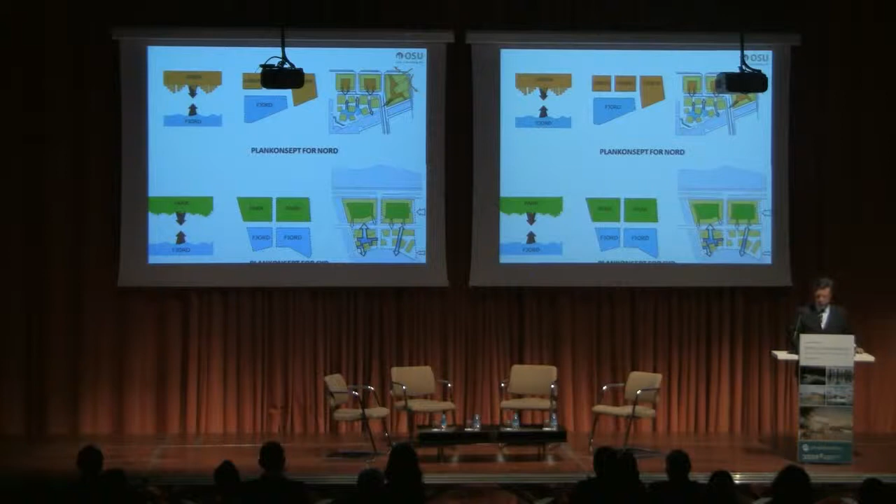So how does the city meet the fjord? And how does the city relate to the neighbor parks? So we merged together some with competitions, Vandkunsten and other architectural firms, and had a lot of different workshops working together closely with the client and also municipality. But we started the other way around, because this is how it looks now, but we started with a program.

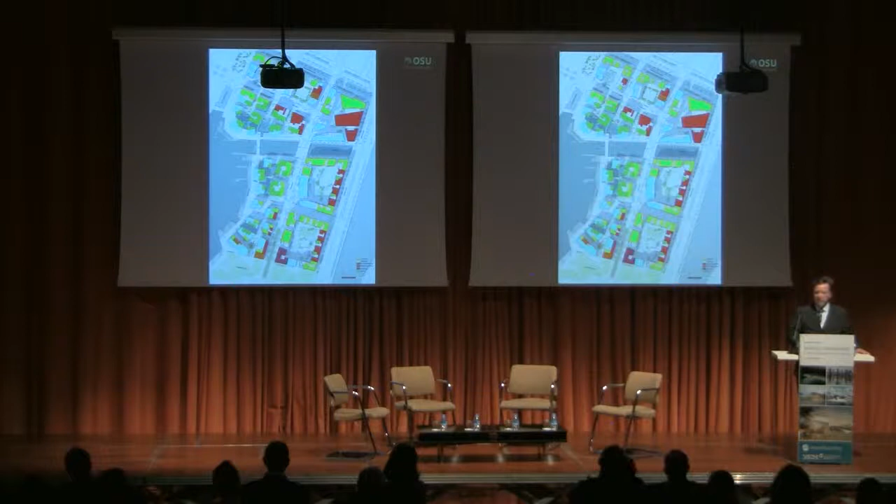How do you want the city to meet the fjord? We want an openness to the fjord. We want, what do you call it, like fingers. And we wanted restaurants. We want all these nice places. We want shops. We want people to meet. We want offices. We want housing. So, and we started then by working with the program.

How do we want this to happen? And then we said, this is not a series of projects. What we are doing is creating a city. So the black arrows you see are the main lines, the roads. So this is the parks. That's part of the big plan that the municipality makes. This is the new main roads. And this is the inner roads.

So what we did is to organize all this small pathway, all these looks, all this series of walking from space to space, and the total hierarchy of making an exciting city with destinations. How to look from the barcode through the niches, through a small gate, into a plaza, between buildings and out to the fjord and further on. How to make this fjord meet the city.

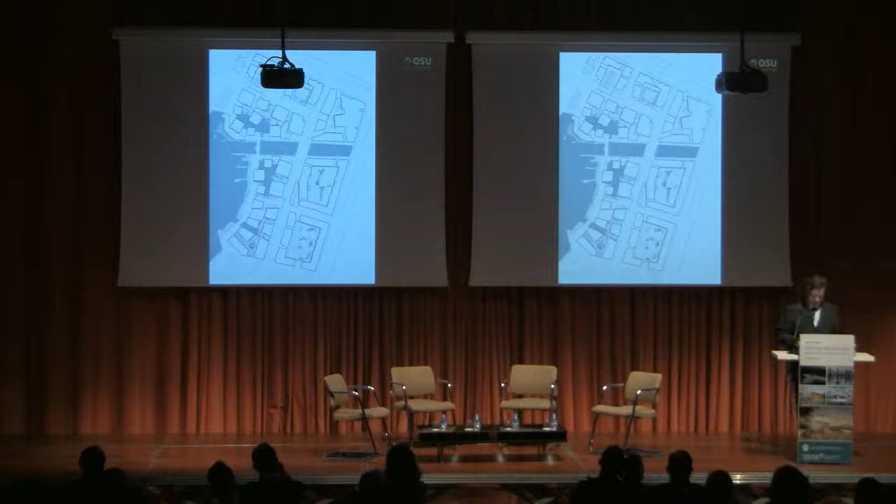Carefully, and in close dialogue with various landscape architects and planners, the municipality and the developers, we worked with every single space, defining the program: who's using it, for what, how big is it, have you seen this before, is it a good space, and defining what's private and what's semi-private. We made the small space on the corner where the bus stop is, the small pockets between the houses, making this filter that will be a city, not a project.

And then after having all the discussion, all the buildings started to emerge as structures and ended up like this. So the city meets the fjord — we call it porös, an openness between the buildings. Bigger structures defining and acting as walls towards all the other spaces and streets, making a clear hierarchy that altogether makes a city.

Seen from the fjord, you get this view to the left, designed by Vandkunsten, part of the whole project. We were very afraid this should feel like you meet a project — no, this is the city, it's the city growing, not project after project. I think that's a critical issue: first make the strategy, then make the architecture, not the other way around.

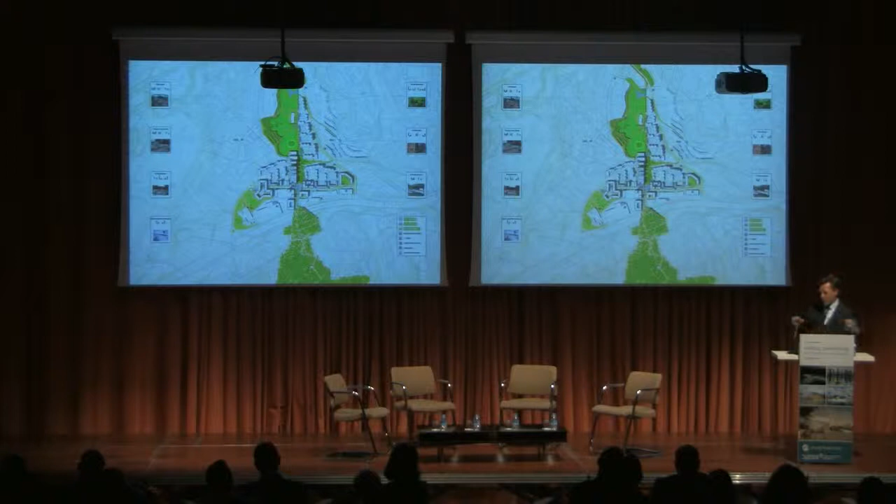Then we made a street, and we said, okay, between this cross — the street and the valley — we can make a plaza, and on that plaza we can succeed in having people meet. We can make one nice coffee shop in this program, and from there we can make this city grow. So that was the strategy.

What we then did was more urban repair, making all these fill-ins, transforming the suburbia into a more city-like structure, defined also by a generator project. It's as easy as this: the pink is the new, and this is all the suburbia and the blocks. So what we did is just define it as a center, making Furuset a city.

Last project I will present is another kind of challenge that we always see. You have this huge area — what do you call it — the sprawl within the sprawl. You have these villa areas, and then you have this industry from the 60s, and some railroads, and this huge mix. And nobody needs this industry anymore.

We have a railway station, and how do you develop this into what? What do you do with all this area?

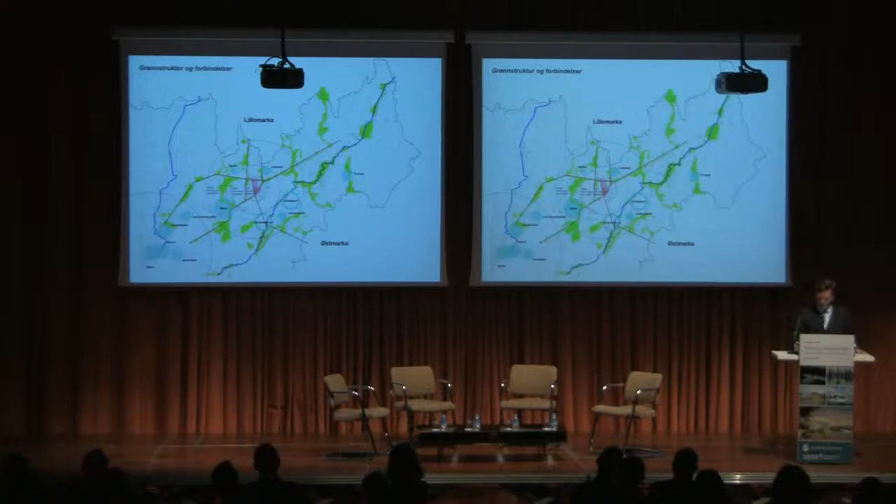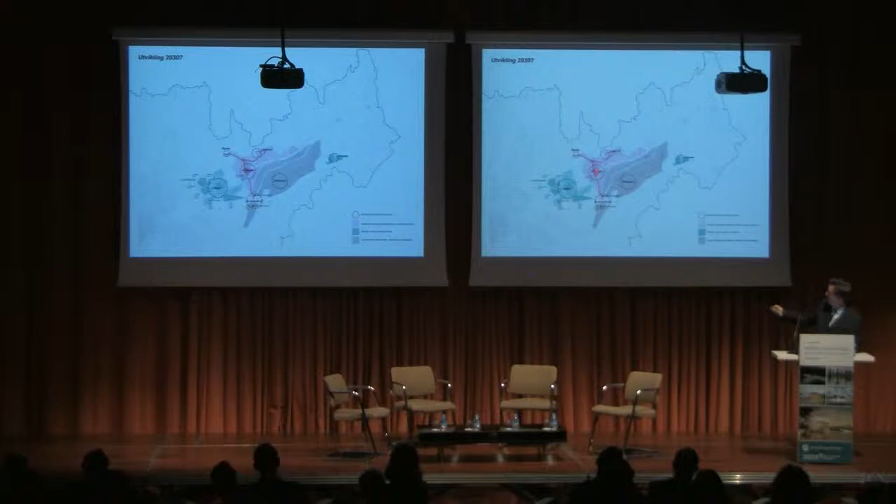So we had to zoom out. Find what is this place as part of the city? How does the streets and everything connect? How does it connect to the neighbor areas? And how does it connect to the green and all the biking areas? What is the drivers of the place? And we had to look into what will these be in 2030. You have these huge growing areas around this area, and this small pink is the site and the plot. What do we do there with this industry?

So we started with the same strategy, because we didn't know what to do. So we said, okay, let's start with the spaces. What kind of spaces and for whom? If we start there, we will see what happens. So we worked a lot with what are called BREEAM communities. We had a first BREEAM communities project in Norway, and we use that tool quite a lot.

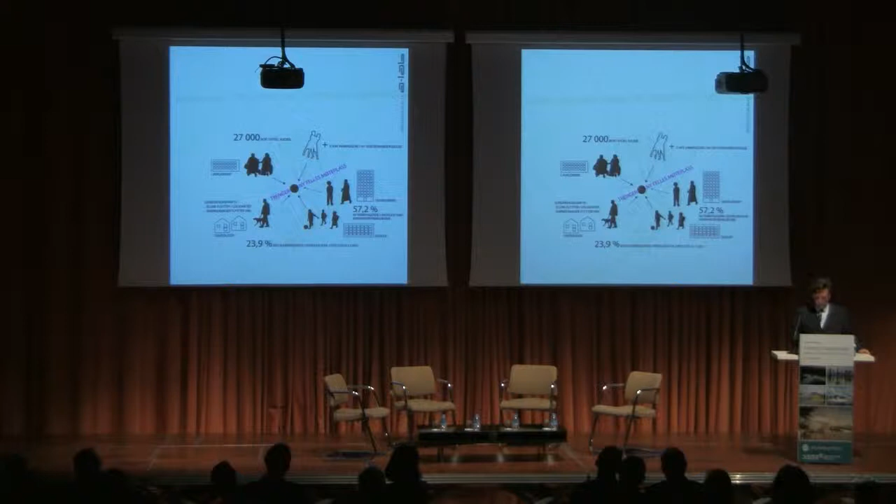Vollebekk has the same growth. It has 57% non-Norwegians. You have all kinds of houses around, and they have nowhere to meet. So we said, okay, let's make a place to meet. Let's organize these places within the schools and make connections so that you can find the tram train, you can walk through this area, walk to the school, and connect to the rest of the area. If you can make that succeed, then we can start building more.

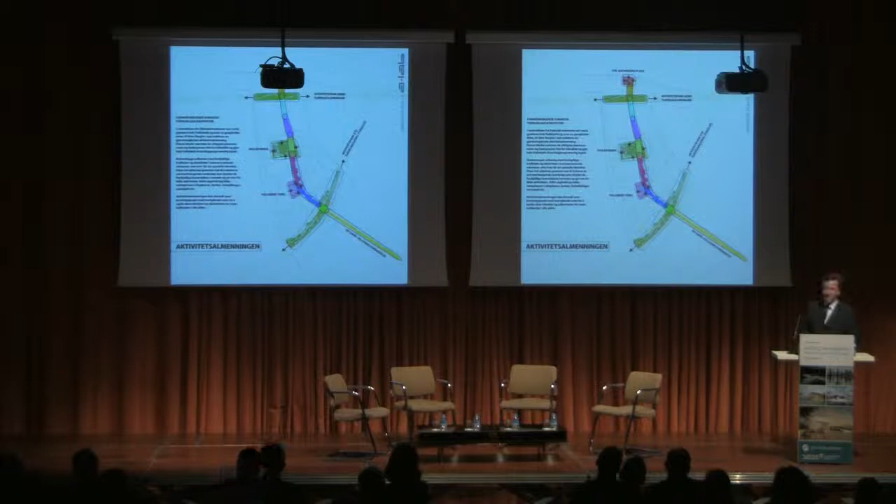So then we developed a landscape structure and make this grow, ending up in a patchwork of urbanity into a large-scale area that looks like this.

So if you remember the first picture, we had this industry here. What we do now is densifying this to be one of the nodes, a village within the village, a part of the city.

Each place has its own geometry. You cannot just take a structure from somewhere else. But it's a lot of structure and a lot of densities. And by studying the various densities and the structures in Oslo, we worked, and that's why we had to make a lot of new programs to make this happen.

So what we did was trying to find what's Vollebekk's, and I just showed this an example. This is a little bit how we work. And then we started working with the blocks, define them, creating the smaller spaces you wanted to have. We pushed the buildings to make even more of the small meetings, the corners, and all these other areas.

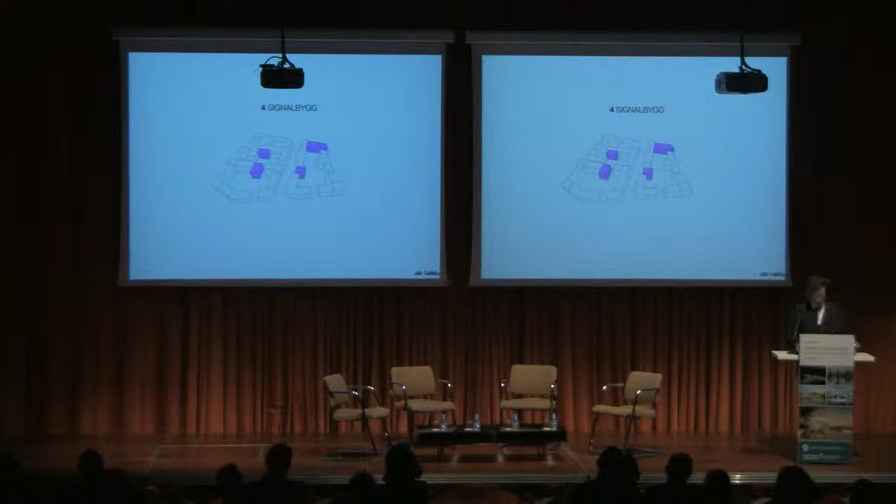We started working, very well aware of what Ellen said about the sun and all these rules that are coming. So it's important from the start to work with the sun, work with variation in heights, and make this nice. And then find the different buildings that need to be emphasized stronger than others, studying the sun.

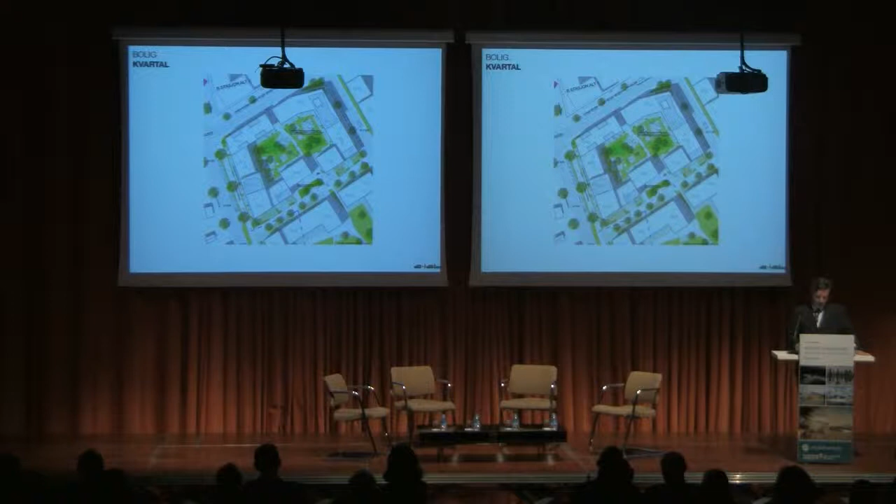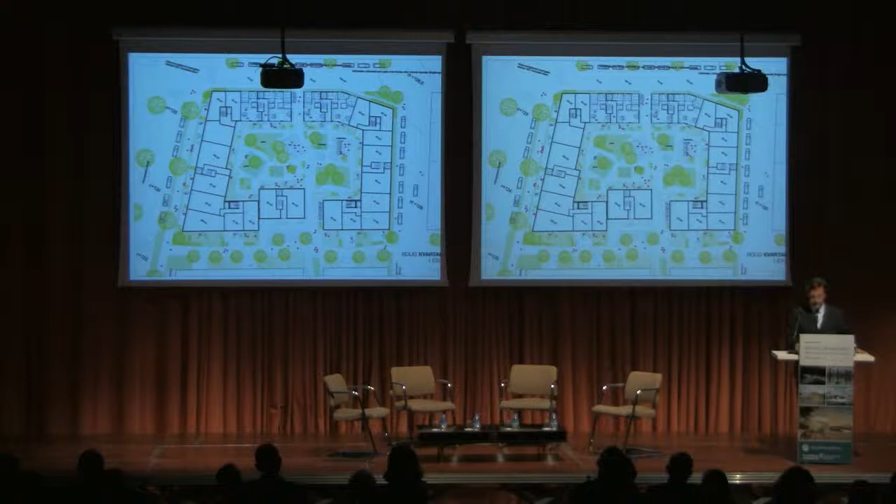And then suddenly a block emerged. A block with smaller plazas, with nice inner courtyards, openness to the neighbors, with apartments with lights and nice sizes, sellable in the market. Balconies and roofs with sun catchers for super sustainable development of this housing.

But at some point, the devil is in the details. To do this, you have to know how to do this. And I think that's the challenging part and the fun thing about being an architect. At some point you get good at doing this, but to lift yourself and get better, you have to learn to do this, and you have to do both. I think that's also the challenge for the future of architects: not being reduced to only work on buildings, but be part of the city development and take responsibility. Go out and be part of the political debate, because I think that's needed. Thank you.